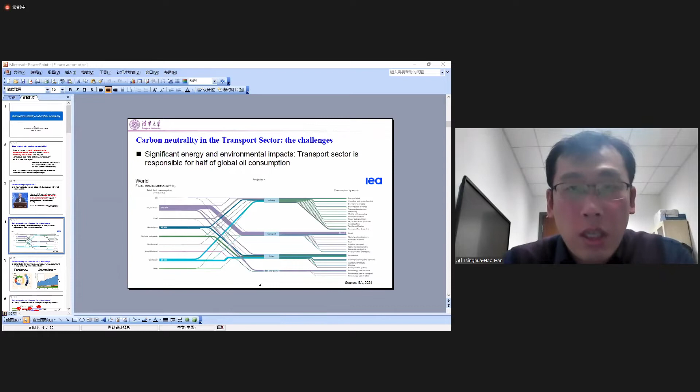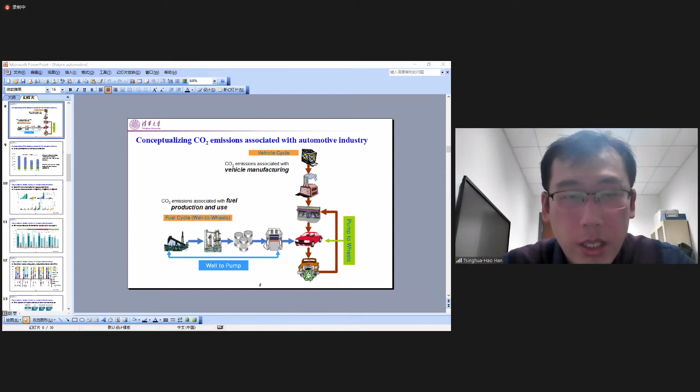I'm so sorry. Oh. So I have switched the page to page 8. Can anyone see this page, or is it still on page 4? Yes, page 8. So it's page 8 now. Okay, now I'm turning to page 9. Can anyone tell me if it's 9 or still page 8? Still page 8. Oh, page 9. So someone tells me it's page 8, and someone tells me it's page 9. I'm not sure. Currently on my side, this is page 9. Whoa. Oh. I'm sorry. So now it's page 9. Okay, so maybe if I turn off screen mode, maybe we can. So is it page 10 now?

Yeah. I guess it's page 10 now. Okay, I'm sorry. Actually, before this presentation, I checked my presentation with the staff, and it was working okay a while ago, but I'm not sure what happened. So I will use my slide without the full screen mode. I hope everyone can see this slide

normally now. Okay. So this is page 8, and this page conceptualizes how the CO2 emissions are generated from the automotive industry. From this figure, we can see two dimensions: the vertical dimension and the horizontal dimension. First, the vertical dimension represents the CO2 emissions from vehicle manufacturing, from the top to the bottom: the mining of the ores, the refining of the ores, vehicle manufacturing, vehicle use, and finally vehicle recycling. For each stage, we need a lot of energy input, so there will be a lot of CO2 emissions from all these processes. Typically, we call these the vehicle cycle emissions.

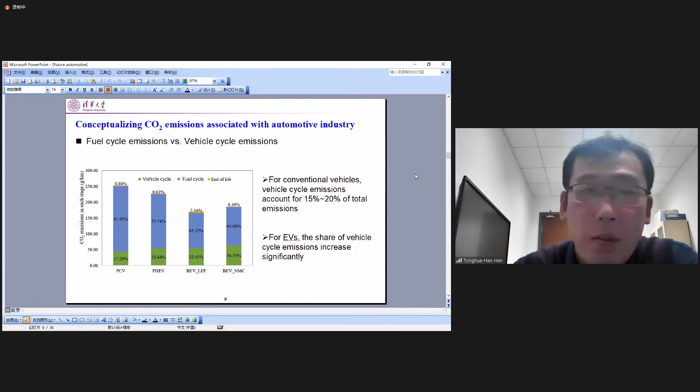Even with China's energy mix, the fuel cycle emissions of electric vehicles are already lower than conventional vehicles. So with this figure, I want to show you that if we want to decarbonize the automotive industry, we have to reduce the CO2 emissions from both the green part and the blue part. We have to make vehicle manufacturing and vehicle use both carbon neutral to reach carbon neutrality of the automotive industry. Next, I will separately talk about how we can decarbonize the fuel cycle emissions and the vehicle cycle emissions. First, the fuel cycle emissions.

I guess many of you might have thought of electric vehicles. Electric vehicles have been very essential to the decarbonization of the transport sector, and in the past several years the global electric vehicle market has been increasing very fast. As remarked by a very famous expert, it is now entering the steep growth phase. What is the steep growth phase? When a new product enters the market, it typically follows an S-shaped curve. In the beginning it grows very slowly, in the middle it grows very strongly, and at last it grows smoothly again. Steep growth means we are in the middle of the S-curve, growing very fast.

This figure shows electric vehicle market penetration in representative markets. For example, in China in 2020, the market share for electric vehicles reached about 5% of total vehicle sales. In Europe, this market share is as high as 10%. And in the leading market, Norway, the country has the highest market penetration for electric vehicles.

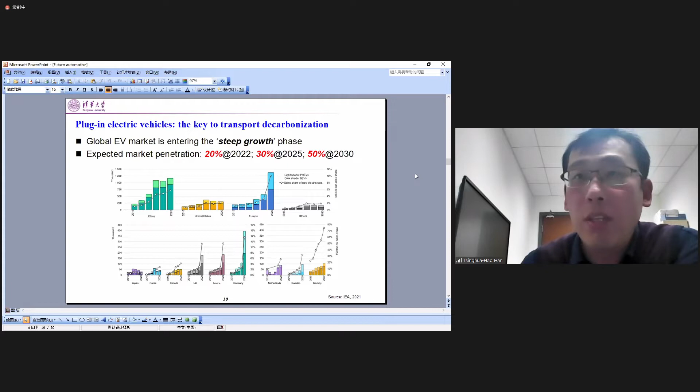Actually, this year in 2021, especially in recent months, both in China and Europe, the monthly sales of EVs has accounted for like 20% of total vehicle sales. So we expect that by next year, 2022, the share of electric vehicles in major markets of the world will be like 20%. By 2025, the share will be 30%. And by 2030, it will be like 50%. So by 2030, only less than 10 years from now, there will be 50%, meaning 1 out of 2 vehicles will be electric vehicles. So really a very strong growth ahead.

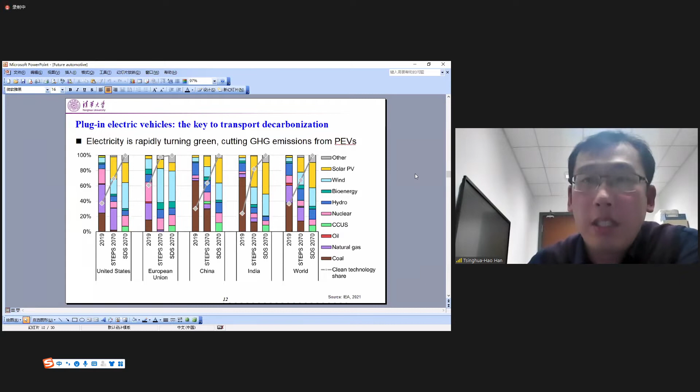Another very important question: we realize that in the future we will use green electricity, so electric vehicles will be green. But someone might argue, is the electric vehicle the only way to utilize green electricity? This is a very important question. Actually, the answer is no. Besides electric vehicles, we have numerous other options that can utilize green electricity.

For example, if we have green electricity, we can use it to electrolyze water to get hydrogen, and use that hydrogen in fuel cell vehicles—that's also a solution to use green electricity. A step forward, we can also use green electricity to produce so-called power-to-liquid, using electricity to produce gasoline or diesel. We can even use this green gasoline and green diesel in conventional internal combustion engine vehicles. So actually we have a lot of ways to utilize green electricity. We have to make one thing clear.

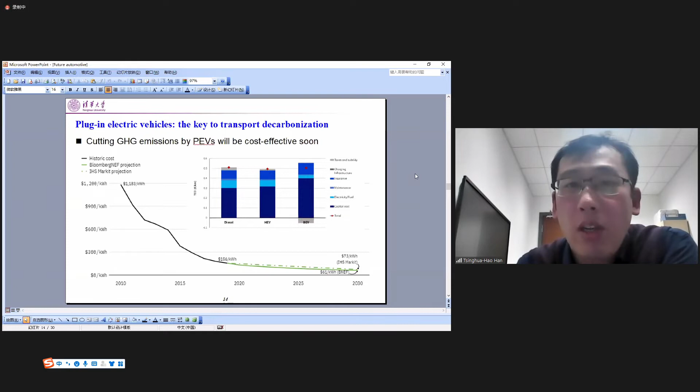So it's very perfect for electric vehicles. On one hand, you can reduce CO2 emissions, and on the other hand, you can even save a lot of money at the same time. So that will be a very cost-effective solution for decarbonizing the transport sector.

Another very important point we need to know is plug-in electric vehicles are not only important for the transport sector, but also pretty important for the whole economy and especially for the power sector. Because currently the power sector depends mostly on thermal power, but in the future we need to integrate a lot of what we call VRE, variable renewable energy.

That is wind energy or solar energy. Because these energies are variable. Why do we call them variable? Because their availability is not determined by whether we need them. For example, if someday I need power, but on that day it is raining and there is no sunshine, I just cannot use solar power to meet my demand. So how can we utilize this so-called variable renewable energy?

We have to prepare a lot of energy storage devices. If we do not have the storage devices, then we just cannot fully utilize these VRE energies. But if we need to produce a lot of dedicated energy storage devices, it will be very expensive and very resource consuming.

But if we look at electric vehicles, actually each electric vehicle has a very big battery on board. So we can consider this battery as a distributed energy storage device. We can use these electric vehicles to serve the grid, to help integrate these variable renewable energies, so that we can save a lot of money. That will help the grid make the transition more easily. Electric vehicles will be very valuable not only to the transport sector, but also for the whole power sector and the whole economy.

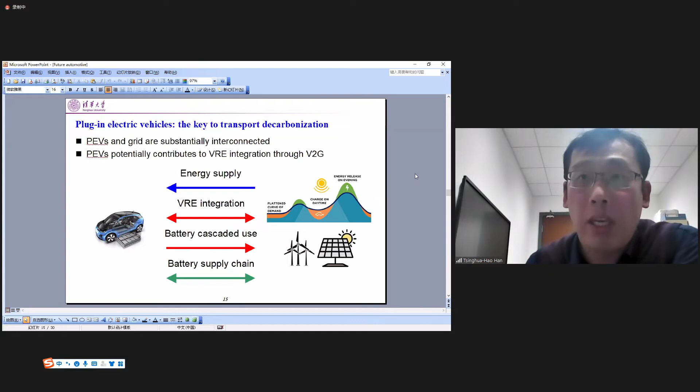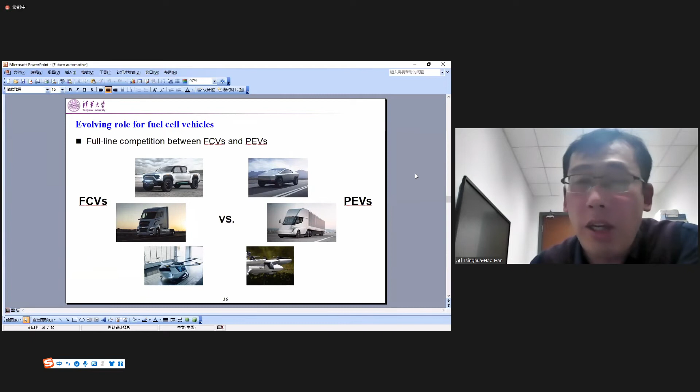But if we look at the market performance, especially the light-duty segment performance, we find that fuel cell vehicles are not having good performance in terms of commercialization. For example, the left-hand figure shows the sales of Toyota Mirai in the United States and the EU. Toyota Mirai is a very representative fuel cell vehicle model, representing maybe the highest sales of all fuel cell vehicle models. But even for this, we find that in the United States its highest sales is only lower than 2,000 units, and in Europe it's only several hundred. That's really a very small number compared with the millions of sales in these two regions every year.

Again, if you look at the trend, it's even worse, because especially in the United States after 2019, there's a very significant drop in the sales of this vehicle model, especially during the pandemic. But even in the pandemic, the sales of plug-in electric vehicles saw very strong growth. So there's a very significant comparison between these two pathways, and it's very likely that from the market performance we can conclude that fuel cell vehicles might never have a chance in the light-duty segment, and many of us believe this.

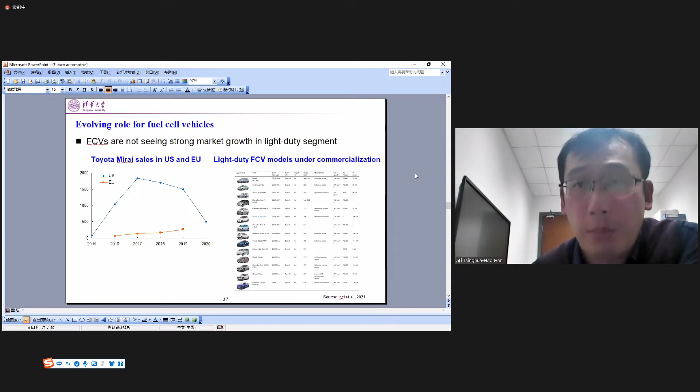The right-hand figure shows the light-duty fuel cell vehicle models under commercialization from major OEMs around the world. The OEMs are making great efforts in commercializing fuel cell vehicle models, but it's really not competitive at all, especially when you compare them with electric vehicles.

If we look at the CO2 emissions from fuel cell vehicles, it's very similar to electric vehicles. The life cycle CO2 emissions from fuel cell vehicles is basically determined by where the hydrogen comes from. Distinguished by where the hydrogen comes from, we typically categorize hydrogen into three major categories: gray hydrogen, blue hydrogen, and green hydrogen.

Gray hydrogen is hydrogen that comes from fossil fuels, mostly coal-based or natural gas-based hydrogen. Even based on fossil fuels, if we remove the CO2 emissions using CCUS technology, carbon capture, utilization and storage technology, then the hydrogen becomes blue hydrogen. Blue hydrogen has emissions, but we remove them using CCUS technology. One step forward is green hydrogen, which is based on renewable energy, using wind or solar energy to generate electricity, and then using that electricity to electrolyze water to get hydrogen. That hydrogen is green hydrogen.

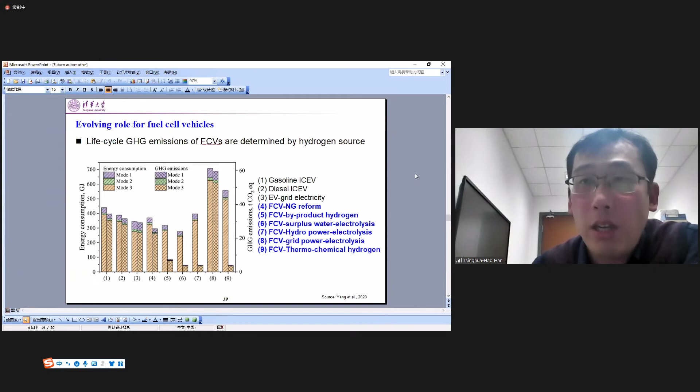But if you look at the 6th, 7th, or 9th pathway, the CO2 emissions are pretty low, because most of these pathways originate from renewable sources like surplus water and hydropower, and also thermochemical hydrogen. So we get very low CO2 emissions. The life cycle emissions of fuel cell vehicles are really determined by where the hydrogen comes from.

One very important point behind this: we love green hydrogen, but how fast can we switch from gray hydrogen to green hydrogen? This is a very important question. Currently, most of the hydrogen we use is gray hydrogen—not because we love gray hydrogen, but because we have to use it, since it is the cheapest. It is much cheaper than green hydrogen, and people are rational, so they just choose the cheapest solution.

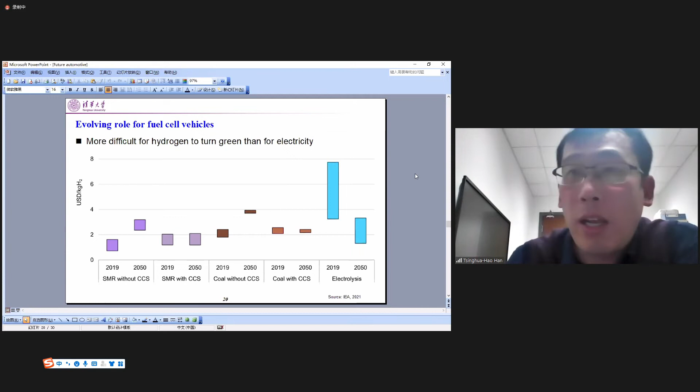Even if we look into the future, into 2050, 30 years from now, if we look at the right-hand bars—the blue bars represent hydrogen from electrolysis, mostly from green electricity, giving us green hydrogen—even in 2050, looking at the range of the blue bars, we are not 100% confident that the cost of green hydrogen will be lower than conventional gray hydrogen. That means even in 2050, there might still be a significant share of conventional hydrogen, only because the cost of green hydrogen is very difficult to lower.

This is very different from electricity, because for electricity, the switch from conventional to green electricity is already happening—the cost of green electricity is lowering down very quickly. In many parts of the world, wind or solar electricity is already cheaper than conventional electricity, so the switch is already happening. But for hydrogen, the switch is very difficult. There is a basic economics behind that, but I will not go into it—just know that the conversion from conventional hydrogen to green hydrogen is very difficult, very difficult.

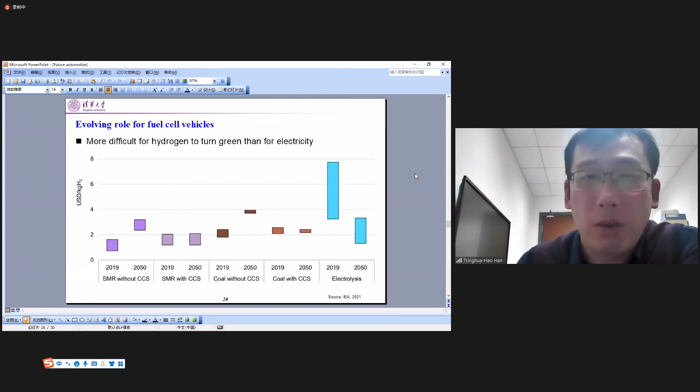So you have to rely on fuel cell vehicles. You just cannot turn to other options. You have to use fuel cell vehicles. So fuel cell vehicles are the only option for this utilization.

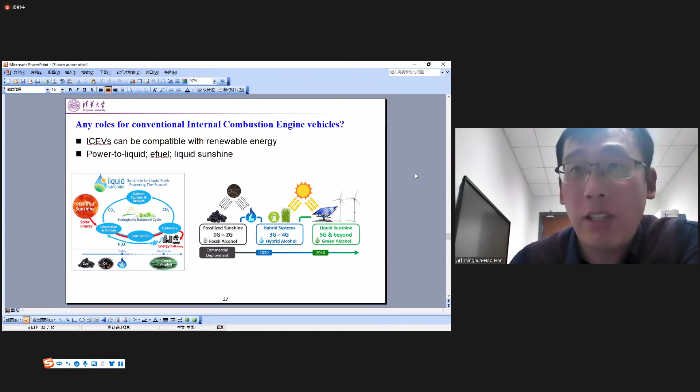Just as we have mentioned in the previous slide, there's a technology called power to liquid, or what we normally call e-fuel, or a more popular word, liquid sunshine. That means we use renewable energy to generate electricity. Then we use electricity to produce green gasoline and green diesel. And we use this green gasoline and green diesel on conventional vehicles.

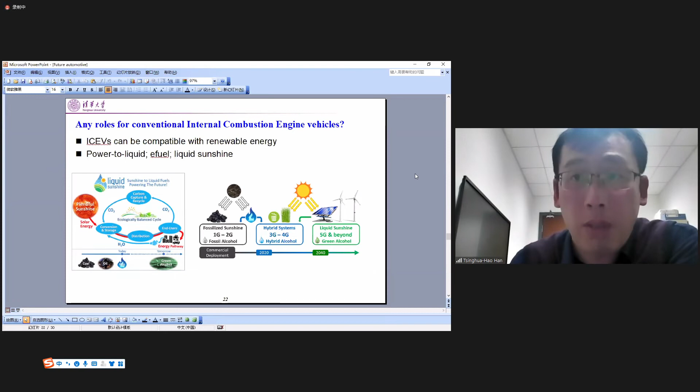So that will be a very clean pathway, right? It is really near zero emissions. And still, we do not have to change our fleet. We do not have to change our refueling structures. That sounds very good, right? And there are really a lot of very attractive features from these pathways.

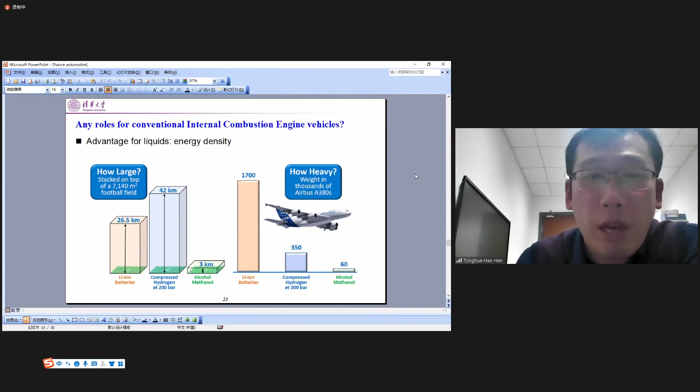For example, if you look at energy density, in terms of both volume energy density and weight energy density, if we look at batteries, fuel cells, and liquid sunshine, these three pathways, we can find that the so-called liquid sunshine solution can provide the lowest volume and lowest weight if we want to store the same amount of energy. And it will be far lower than the battery and hydrogen solutions.

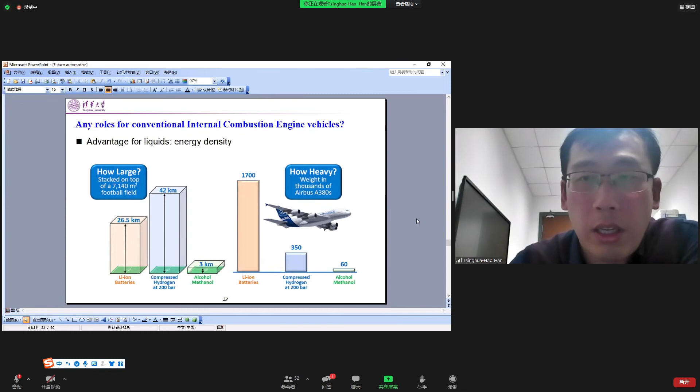And another very big advantage is, we just do not have to change our fleet. We do not have to change the refueling structure. We have been building this fleet and this refueling infrastructure for 100 years. So we do not have to abandon them. We can just change from conventional fossil-based liquid fuels to renewable-based liquid fuels. We do not have to change other things. So that will save us a lot of money. So that's one very attractive feature of this pathway.

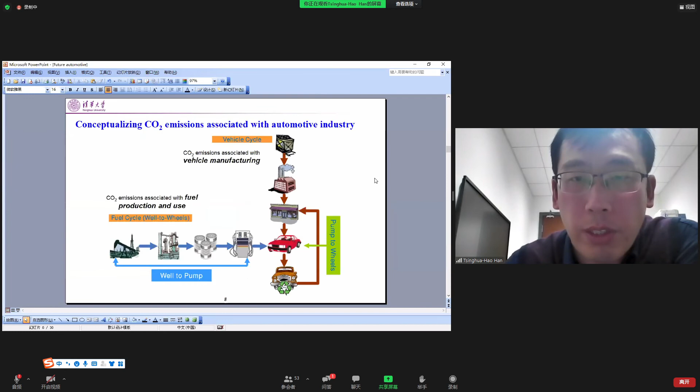Okay, so that sounds very good, right? These liquid fuel pathways are really attracting a lot of research and industrial interest in recent years. But we must remember one thing: the most substantial weakness of this pathway. Actually, we have mentioned this before. The most substantial weakness of this pathway is that the energy efficiency is pretty low, just as we mentioned in the previous slide.

Okay, as we can see here, the right-hand two bars are power to liquid, both diesel and petrol. Yes, they are perfect in many terms, but the energy efficiency is awkward. It's 20%, 16%. So there's a lot of waste of energy along the conversion of these fuels. So that's the substantial weakness of these pathways. That means the fuel cost will be high, and the whole economy will be less competitive compared with other pathways.

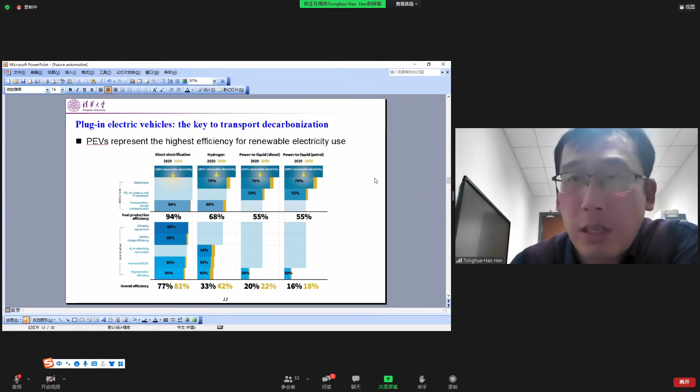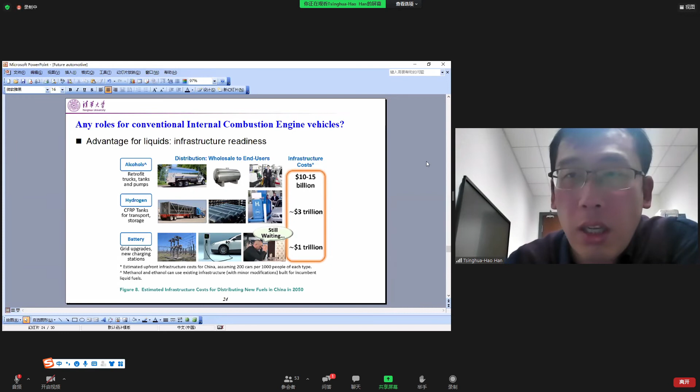So for this pathway, the most likely use might be in some very special circumstances like aviation, like long haul aviation, in these very special utilizations. Okay.

Okay, so we have talked a lot about the CO2 emissions from the fuel cycle. So for the next few slides, I will talk a bit about the emissions from the vehicle cycle. The vehicle cycle emissions are relatively complicated, because when we manufacture a vehicle, we need a lot of resource inputs, energy inputs and labor inputs. So all this stuff will generate certain CO2 emissions.

So today I will give you a relatively simple example. That is the CO2 emissions from battery manufacturing, because the battery will be the core component for future vehicles, right? This figure shows the processes needed to produce a battery, from the left hand side, starting from the minerals, all the way to the right hand side, the final product, a battery pack.

From the left hand side we can see everything starts from the minerals, because you have to dig something out of the planet and use it to produce the product you need, right? First we need to dig them out of the mountains or out of the seas, and we get cobalt minerals, nickel minerals, manganese, lithium, or lithium brines. These processes generally happen in mines, and you need machines to dig the minerals out, and electricity to power the machines.

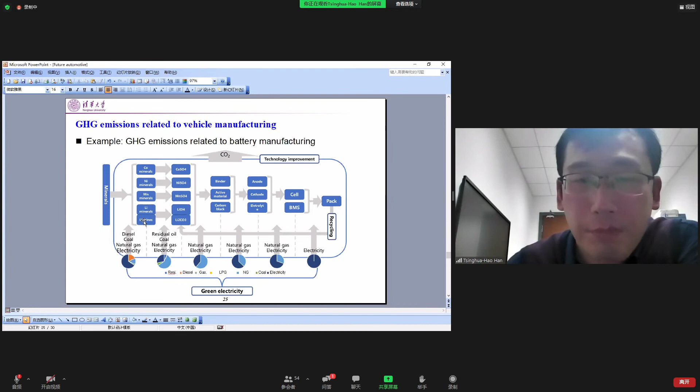So how can we reduce the CO2 emissions from the factory? The most important thing is to reduce the drying demand. We can use segmented drying, infrared drying, or laser drying to do this.

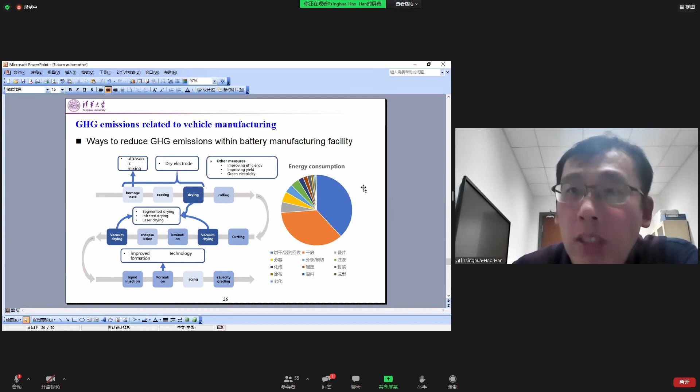So if we assume a vehicle with 50 kilowatt hours of battery capacity, that's very typical in China's vehicle market. That means if we produce this 50 kilowatt hour battery, we need to emit about 4 tons of CO2, right? That's really not a small number, because even for conventional vehicles, the life cycle emissions of vehicle manufacturing are only 6 to 9 tons of CO2. So this battery alone will add another 4 tons of CO2 to the life cycle emissions. That is very CO2 intensive.

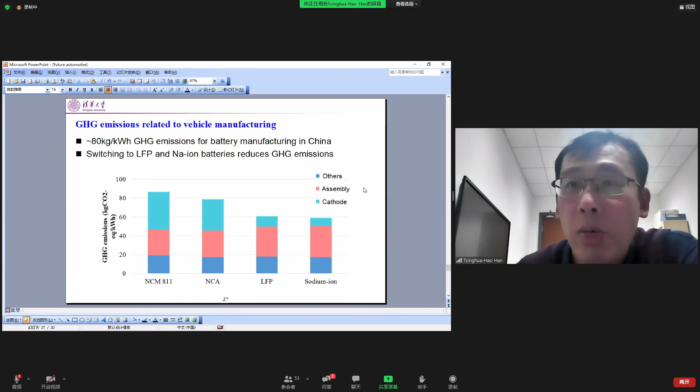But if we look at other chemistries, for example LFP, lithium iron phosphate, or sodium-ion batteries, these 2 chemistries emit lower emissions. Actually, in the Chinese market, LFP batteries are doing very well, and people are using them more than conventional NCM batteries in recent months. We use them because they are cheap, safe and reliable. But besides that, they also provide a very big benefit: they reduce the CO2 emissions when we manufacture them. That's a very big advantage for LFP batteries.

At the same time, we have one final solution for this: using 100% green electricity plus using electricity as process energy. That will provide us with near zero life cycle emissions. As we have shown in the previous slide, many of the processes depend on electricity, so if the electricity is 100% green, all the processes will be very clean. This is true not only for batteries, but for a lot of industrial products. As long as the electricity is green, the production of the product is green. So the future of industrial decarbonization really depends a lot on the grid.

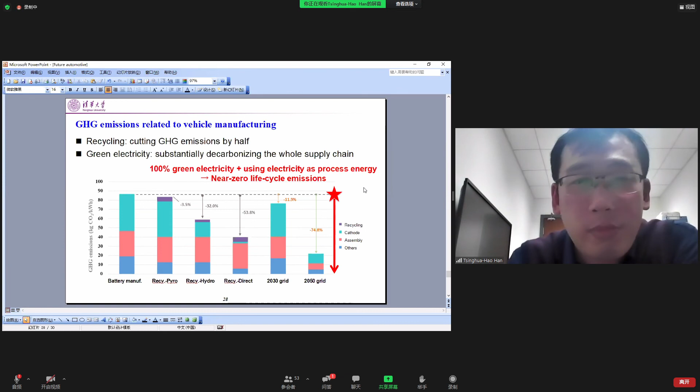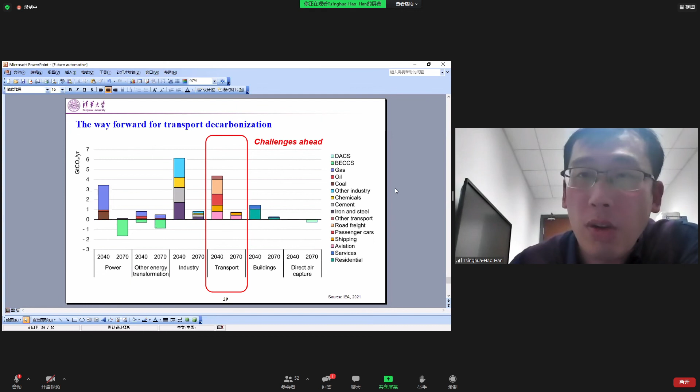And to achieve this, it depends on very substantial technology innovation and also very substantial industrial transformation. That is, I think, part of the meaning of the so-called future automotive. It means a lot of challenges ahead, and I also believe it means a lot of opportunities ahead. Okay, so that's all for today's lecture.